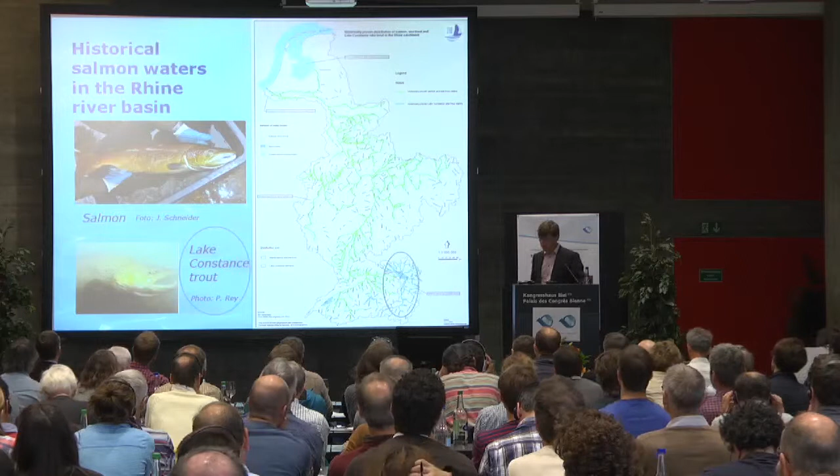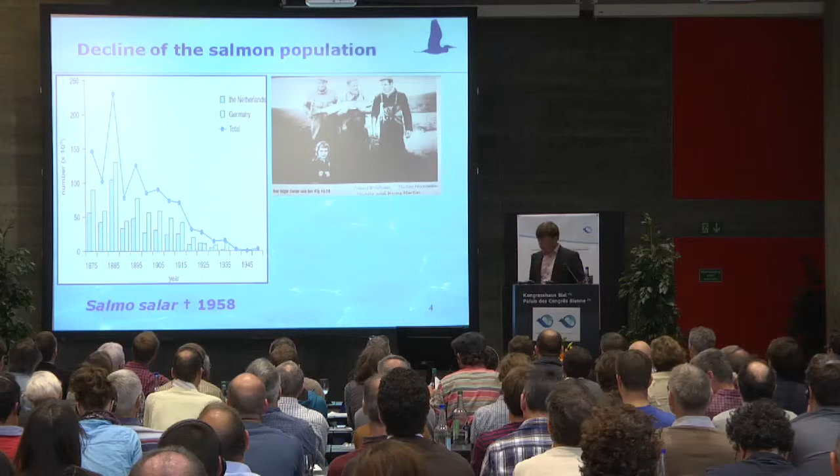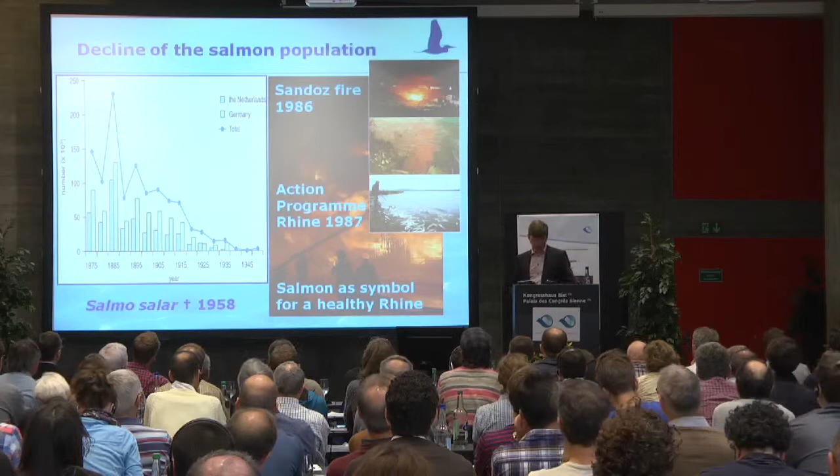And then in 1986, the Sandoz fire disaster practically wiped out the life in the mainstream of the Rhine when a storage of chemical pesticides burned down. And already 1 year later, the Rhine Ministers brought the Rhine Action Program into life. Well, I only tell you this because the ministers took the salmon as a symbol for a healthy Rhine, which was a rather brave thing to do at that time, because it was an extinct species.

However, in the years that followed, the water quality improved significantly, and nowadays we work with the Master Plan Migratory Fish Rhine that aims at the restoration of a healthy aquatic ecosystem. And with a healthy aquatic ecosystem, you will also have a population of Atlantic salmon. So this objective is to be achieved by restoring the river continuity, not only for the salmon, but for all other species, by restoring habitats and by reintroducing young salmons into the system.

The map that you see will be part of the second River Basin Management Plan according to the Water Framework Directive. So it's not for Switzerland, but for all the other countries it is important. And it gives you an impression of the parts of the Rhine system that are now accessible for migratory fish. Well, you can see we have done a lot, but there is still a way to go. The total costs for the whole program are now estimated at 560 million euros. So that will be the whole program, everything that is envisaged now. And I have to tell you that these are the data of October 2014.

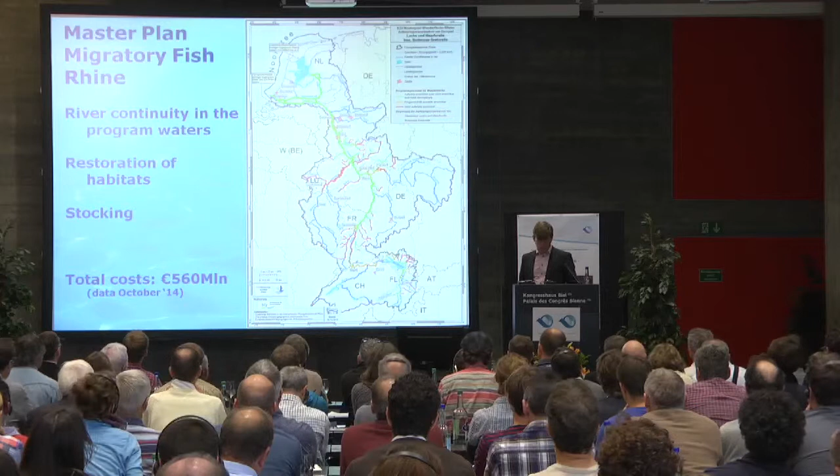In the next slide, I'll go quickly through the measures taken. And I'll start with the river continuity. As you can see, we are working on the improvement of the river continuity, and not only for salmon, but also for the other species. And between 2000 and 2013, almost 500 barrage weirs were made passable for fish. And it must be said that up to now, the main focus has been on the upstream migration.

Secondly, work is being done on the improvement of habitats. All in all, more than 1,000 hectares of spawning and juvenile habitats are supposed to be opened in the Rhine catchment. And in 2012, about a quarter of that, about 250 hectares, were already made accessible.

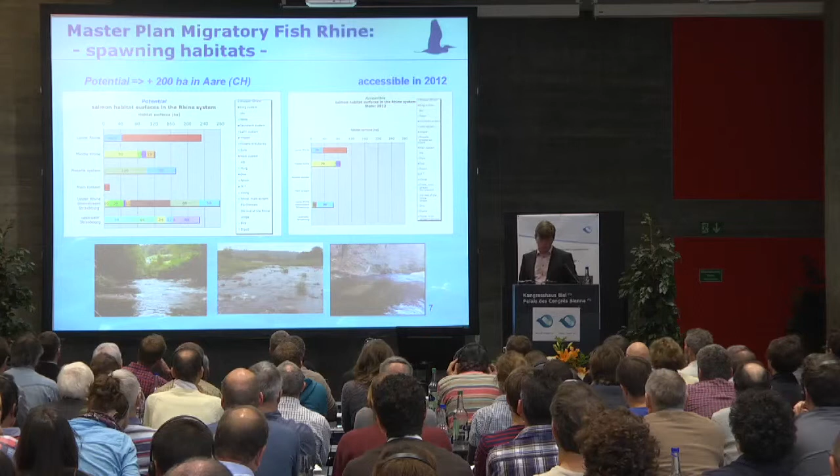Then finally, the stocking. Millions of young salmons and also of other species have been stocked. And all over the Rhine system, the benefits of these actions are to be seen by the growing numbers of fish species that have not been seen for long. And it's not only the salmon, but also, for example, the shad and other species. There are even places where the stocking of salmon can be reduced because of the natural reproduction.

And in this map you can see the very small fish symbols, and where we place the fish symbols, there we have natural reproduction. And the bigger the symbol, the more natural reproduction we have. So I think that's very encouraging if you think of 1987, when the salmon was an extinct species.

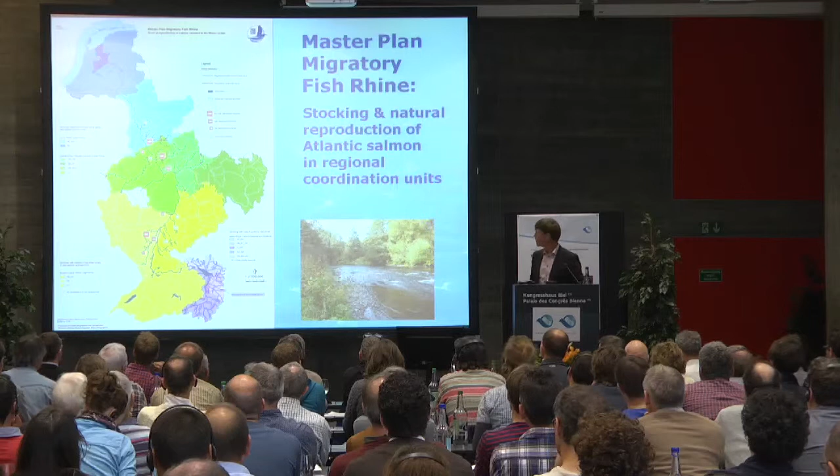All these developments led to this picture on the presence of salmon. And I know I will get a question from Ted Castro, because this is not about percentages, but about the absolute figures. However, it started with a very happy happening in 1990, that the first salmon was found in the Rhine again. So after that, we kept on counting.

But as you can see, since 2007, the trend of growing numbers of returning salmons developed in a reverse direction. And it must be said that even for the fish experts, it is a slightly puzzling picture. There are several possible reasons for this development. It could be that natural predators get used to the growing amounts of smolts. It could be the difference in monitoring. For example, in the Netherlands, fishing with fykes is forbidden since 2011, and we got a lot of data from that. It could be works in the river system.

For example, the land reclamation for the Rotterdam harbour, or the temporary closure of the fish pass in Kostheim. And also the effect of hydropower installations is mentioned. However, as I stated on the bottom, the latest figures are promising again.

In the first 6 months of this year, both in Kostheim and in Gamsheim, the numbers of counted salmons were already higher than the yearly averages of the last 5 years, with another 6 months to go. In Kostheim, 72 salmons were counted, with the yearly average being 70. And in Gamsheim, 56 animals were counted, with the yearly average being 39.

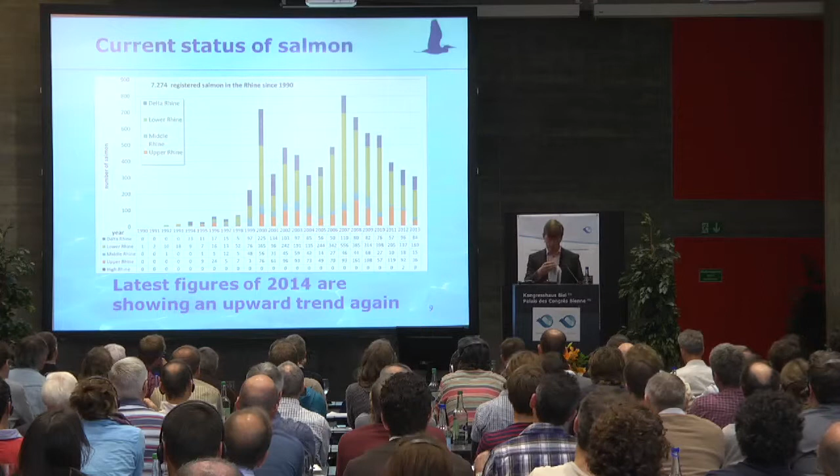With the growing numbers of fish migrating along the river, it became clear that not only the upstream, but also the downstream migration must be secured. The effects of hydropower installations are becoming more and more visible. And partly this is because there are more fish that can be damaged, and partly because the policies on renewable energy increase the number of hydropower installations.

Therefore, in 2013, the Rhine Ministers at a conference stated that for a juvenile salmon or adult eel, the downstream migration in the turbine areas is critical because of the great danger of injuries, particularly in cases of successive hydropower plants. And the ministers stated that no new obstacles should be constructed, and asked the ICPR to work intensively on the joint determination of innovative techniques of downstream migration.

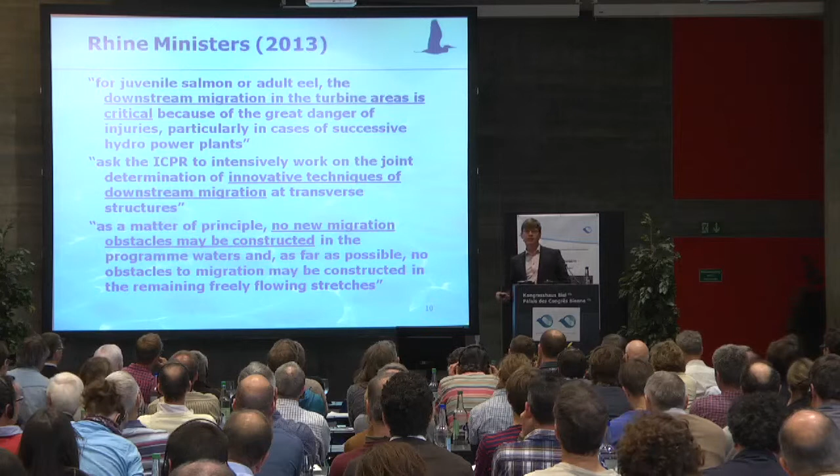So I think now it becomes more interesting for you, because this is where we started, in order to comply with the wish of the Rhine Ministers. We started with an inventory of the bottlenecks for downstream migration. All the Rhine countries collected data. And in this map you can see an overview of the 552 obstacles or bottlenecks along the river. Only a few of them have downstream migration facilities, namely 29, which is about 5%.

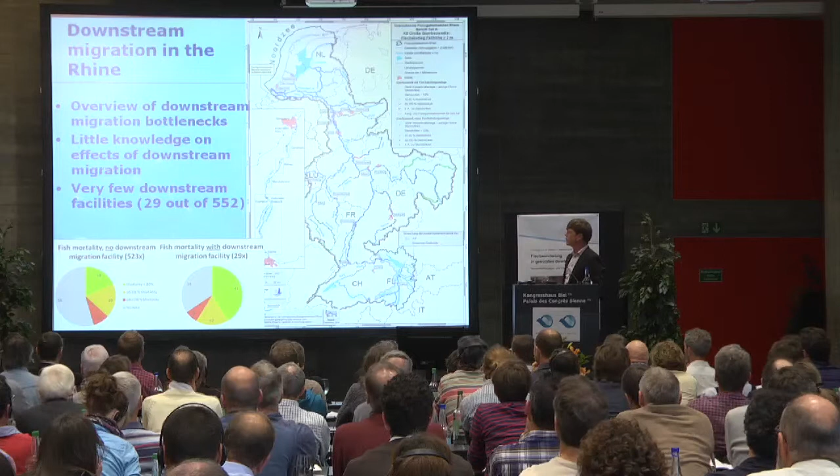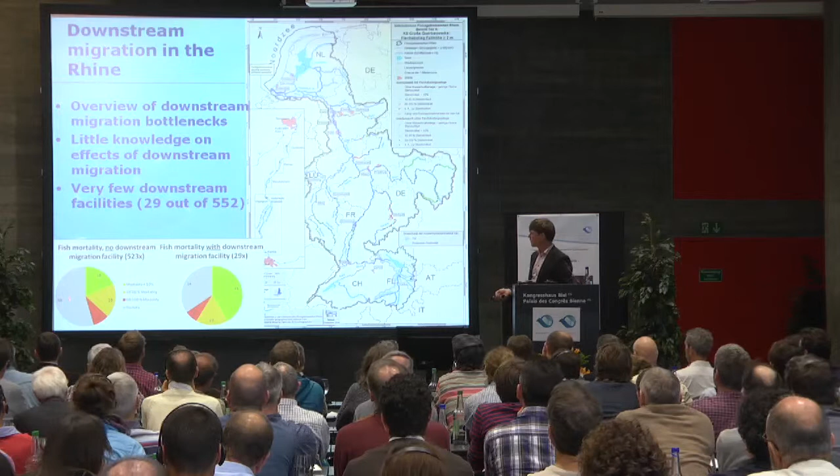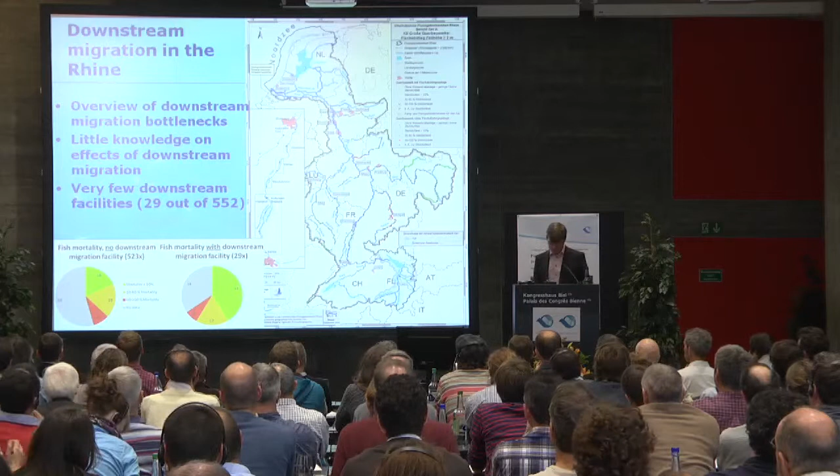And I should click. We asked the authorities whether there was fish mortality or not, and as you can see in the bottom left, for about 45% of the installations they don't know, and even in the cases where downstream migration facilities are installed, still for 34% they don't know whether they work or not. However, you also can see that they expect that there is a positive effect of the downstream migration facilities. Now, later on, we'll see whether they do work.

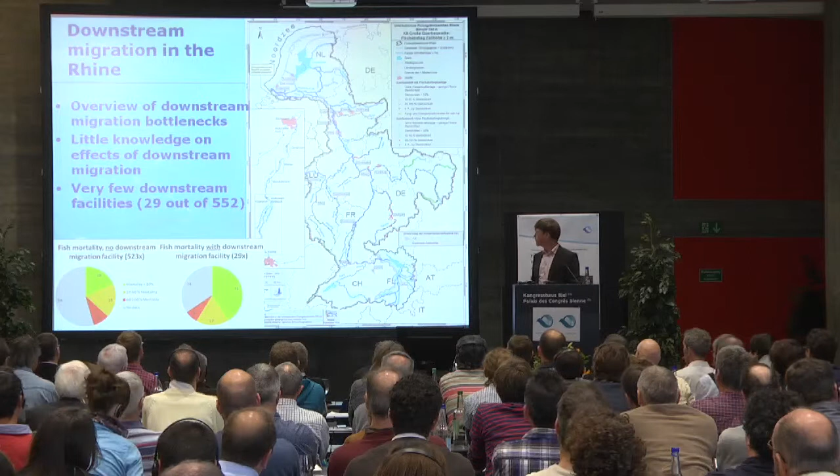Of course, these facilities are needed mostly in the cases where we have hydropower. Now, in the Rhine system, the most widely used designs date back to the 19th century and the beginning of the 20th century, in times where fish migration was not an issue. And in the Rhine system, the Kaplan turbine is dominant, where we counted 159, especially along the mainstream of the river. And other types are the Francis and the Banki-Mitchell, which is also known as the cross-flow turbine. And in smaller, newly built stations, you sometimes see the Archimedes screw turbine.

Well, in this picture of the Kaplan turbine here, you see there's a man standing on it. So it's a huge thing. This is one of the turbines that is installed in the Vogelgrün installation. Well, numerous experiments have been conducted in various countries to determine the mortality rate due to the passage through the turbine. And that rate varies from under 5% to over 90% in Francis turbines, so the one over here. And on average, it's a bit lower in Kaplan turbines, from under 5% to approximately 20%. Well, we'll hear more about this when Steve Amaral does his presentation.

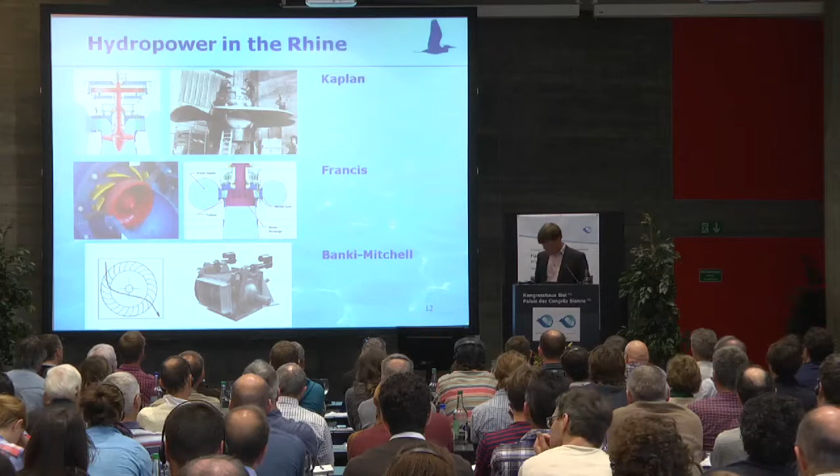So the first measure is to prevent fish from passing the turbines by using screens. We have 3 recent studies on downstream migration facilities, and I must say that Mr. Bauerfeind already showed you some of those. Not this one, however. The first study we found was on Kostheim, the Kostheim installation in the Main River. It's a study of 2011. The hydropower station there was built between 2007 and 2009.

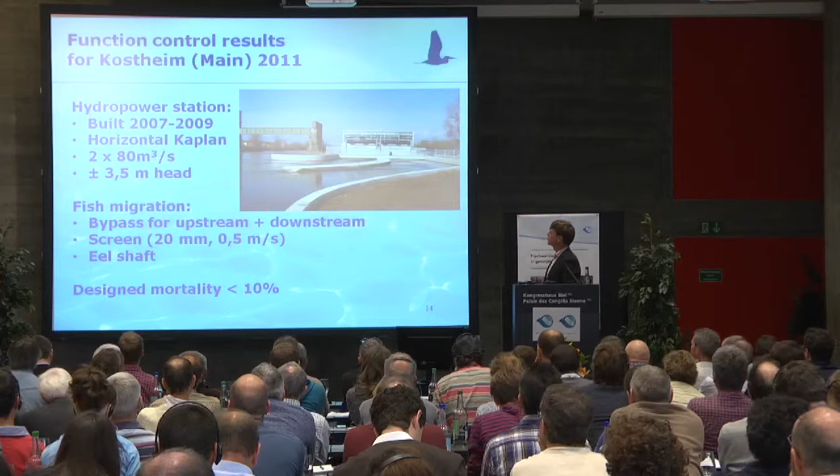It's a horizontal Kaplan, 2 horizontal Kaplans with a flow rate of 80 cubic meters per second. It's about 3.5 meters head. And the fish migration facilities are a bypass river for upstream and downstream migration, a protective screen, 20 millimeters wide and 0.5 meters per second velocity, and an eel shaft. And the designed mortality, so this is what they thought that it would be, was less than 10%.

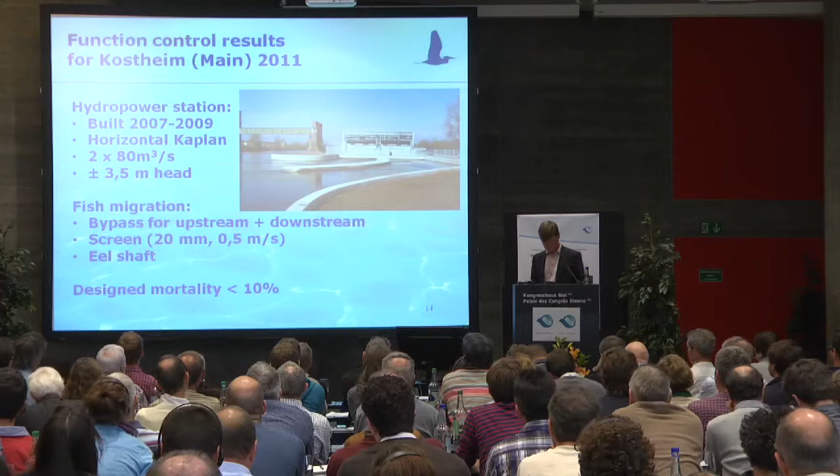Well, this turned out not to be the case. The mortality is about 50% because of the screen cleaning, because of screen and turbine passage, and it depends a bit on the discharge, on the species, on the individual differences, and also on the intervals in screen cleaning. The screen turns out to be passable for eels smaller than 65 centimeters and for other species smaller than 25 to 30 centimeters.

Smolts passed the screen tail first and were stripped of their scales before being struck by the turbines. Even at optimal circumstances, which should be optimal at low use of the turbine, about 50% of the bigger eel ends up in the garbage coming from the screen cleaning. In normal operation, the eel shaft is used neither by eel nor by other species as a downstream migration facility, and the bypass river is not significantly used by migratory fish for downstream migration either.

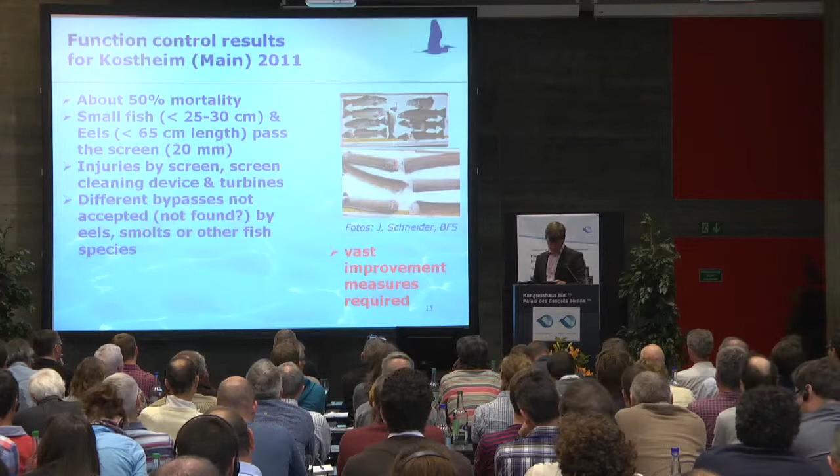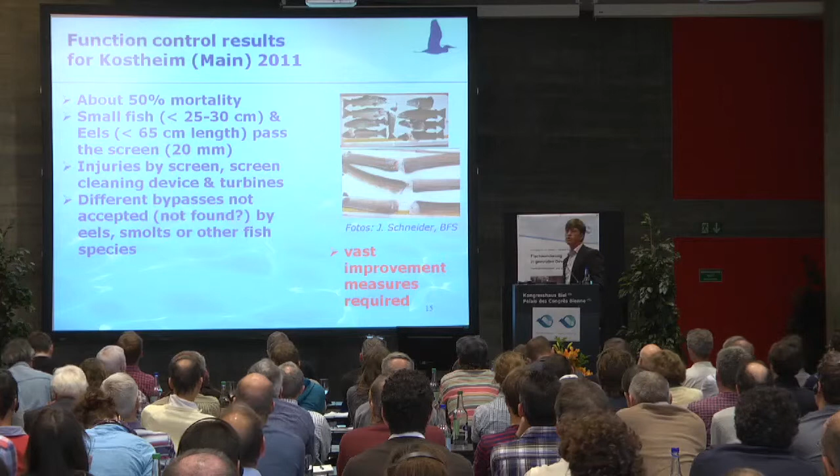Finally, the salmonid downstream facility at the top of the screen does not work. So something must be done there. It's a bit of a pity because the whole installation cost about 20 million.

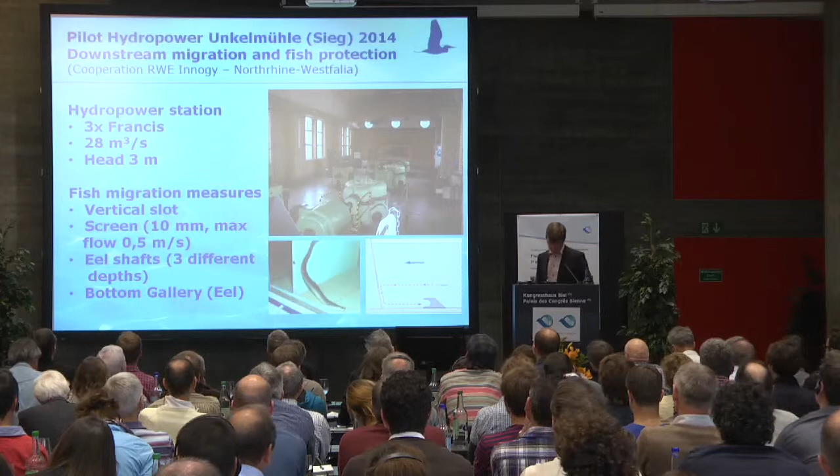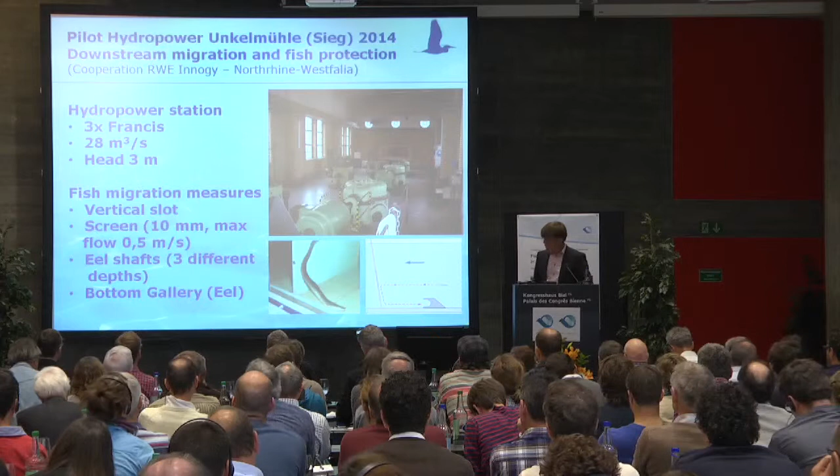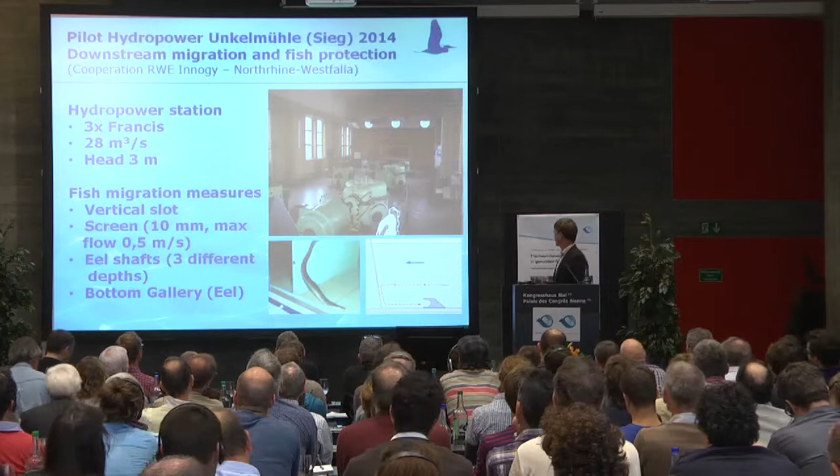Well, there will be 2 installations that were already presented to you. Unkelmühle in the Sieg. The station is 3 times Francis, 28 cubic meters per second, at a head of 3 meters. Fish migration measures are a vertical slot, a screen. Well, you've seen everything about it. What wasn't told is that there's also a bottom gallery, and that's especially for downstream migrating eel. And the idea is that the eel swims to the screen and then swims back into the bottom gallery and is moved downstream.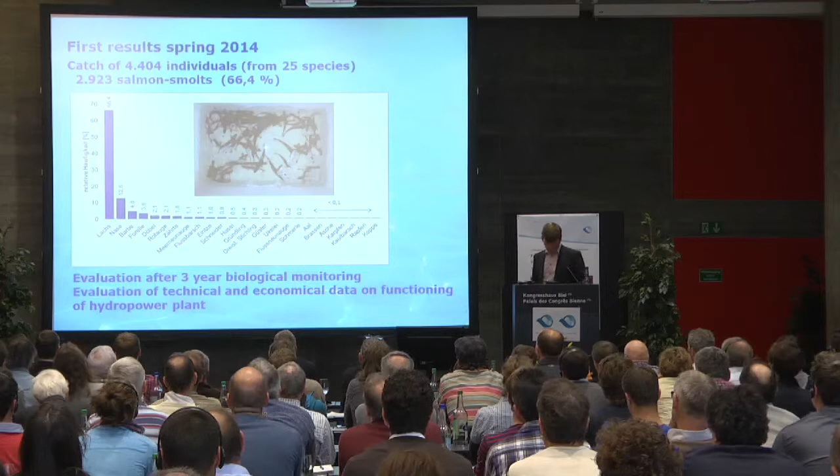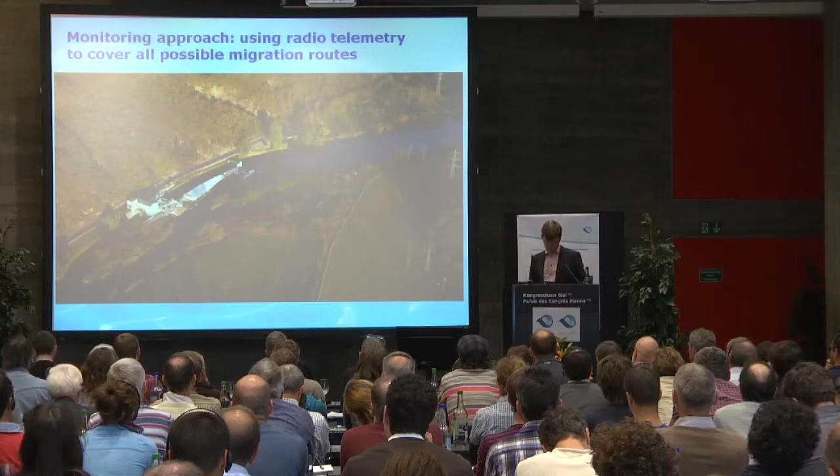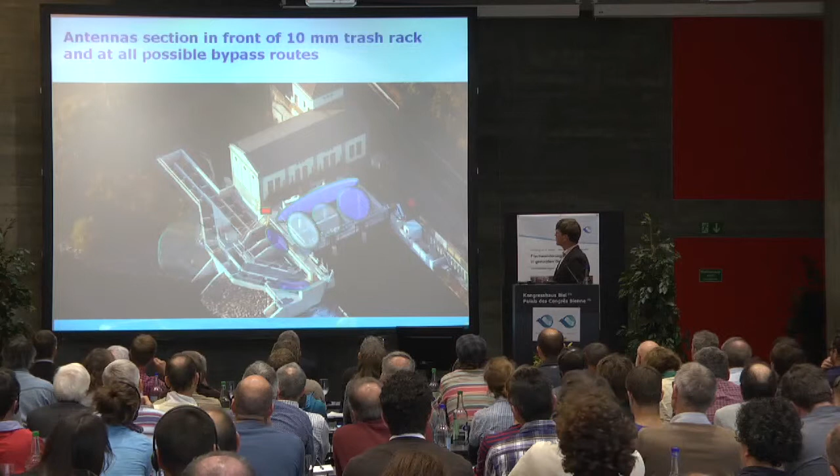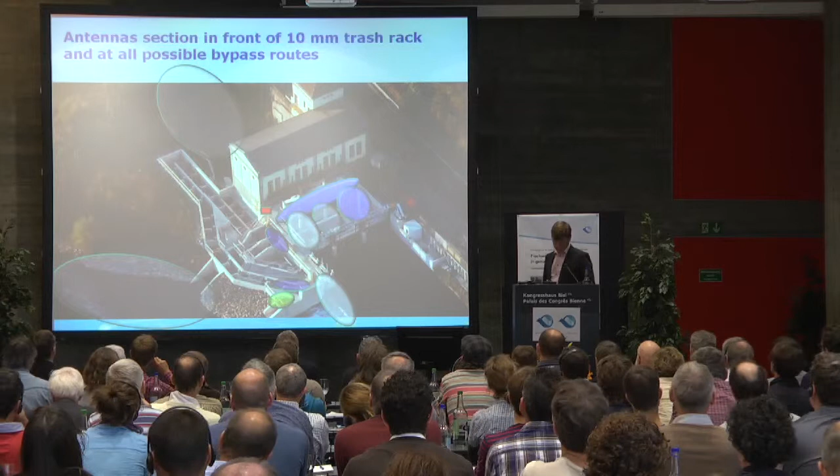A 3-year period of biological and technical monitoring will be ongoing until the end of 2016 in order to evaluate the biological and the technical results. And by the technical results is meant the energy production and the energy losses, because the screens are good news for the fish, but also cause a loss of head. And these are the places where the antennas are installed around the installation. And here they are installed within the installation. So I think after 3 years we will be able to tell a lot more of what's happening there. And in spring 2014, there were already smolts equipped with radio tags and silver eels released upstream of the installation.

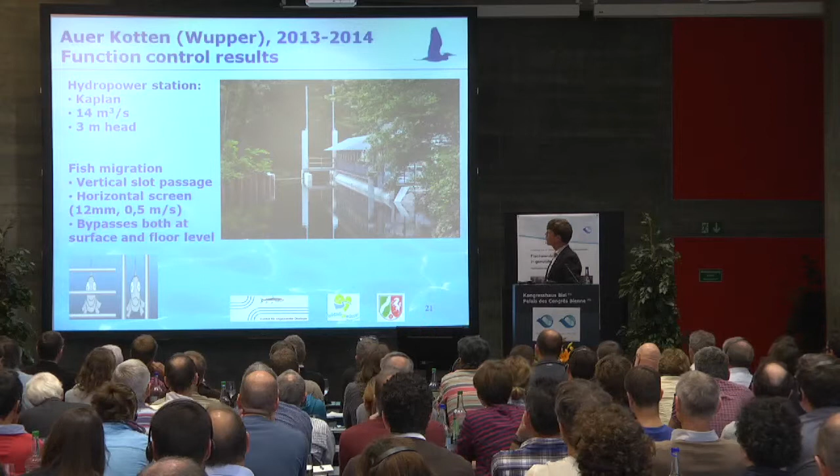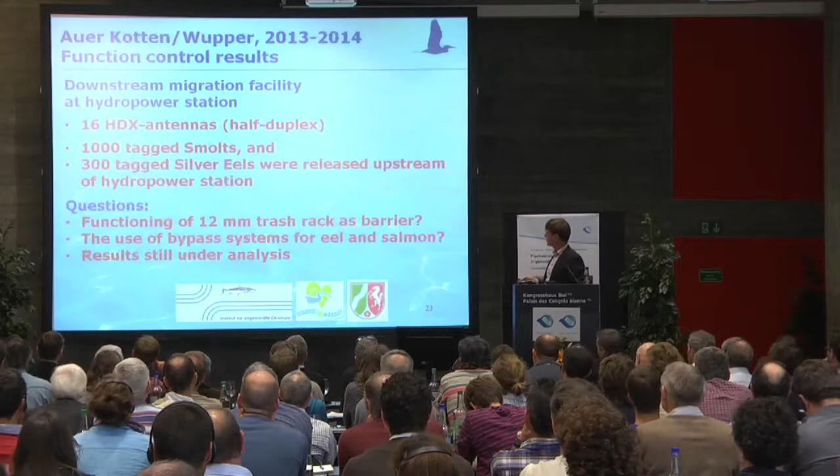Next one, also a well-known slide. Auer Kotten in the Wupper River. This was an existing hydropower station where the screen was placed in front. So it's a Kaplan turbine, 14 cubic meters per second, 3 meters head. Well, we've seen everything that was installed there, so I won't go into that. The bypass, again, you've seen that. So the question was to evaluate the functionality. The installation is equipped with 16 HDX antennas, and yesterday Hendrik Hoefkaart already showed you how they work, so I don't have to do that.

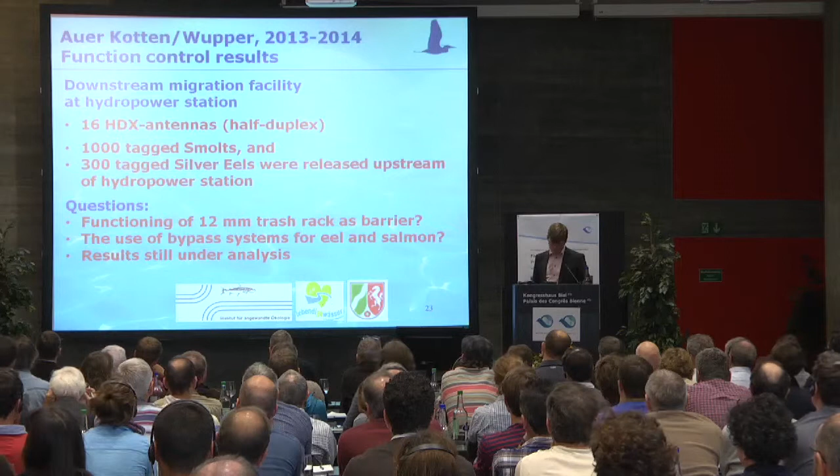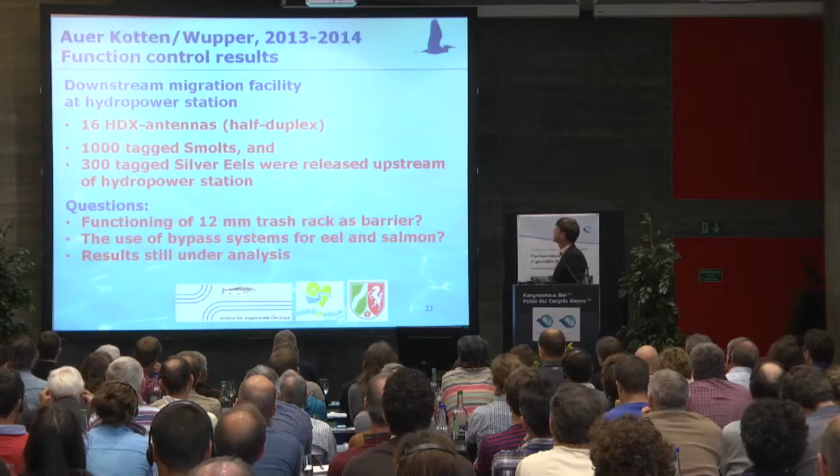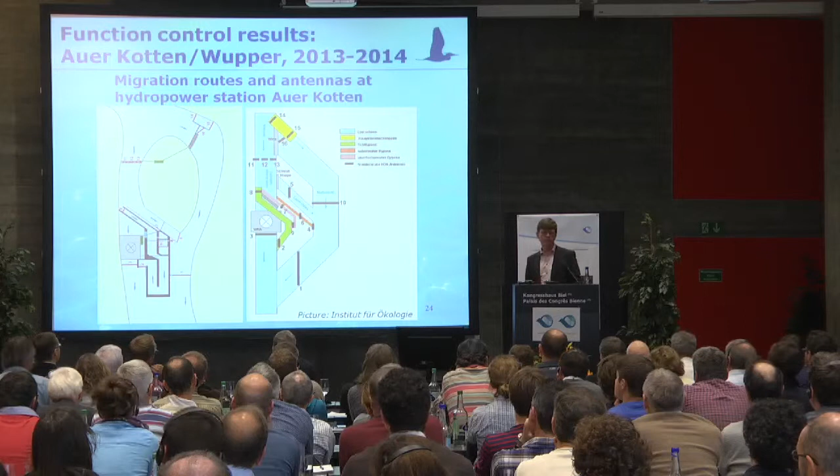Then we go to the alternative turbine design. Also a question already posed. Well, the first one where we found studies was the Archimedes screw turbine. Of course, this is a very, very old design, but mainly used for pumping.

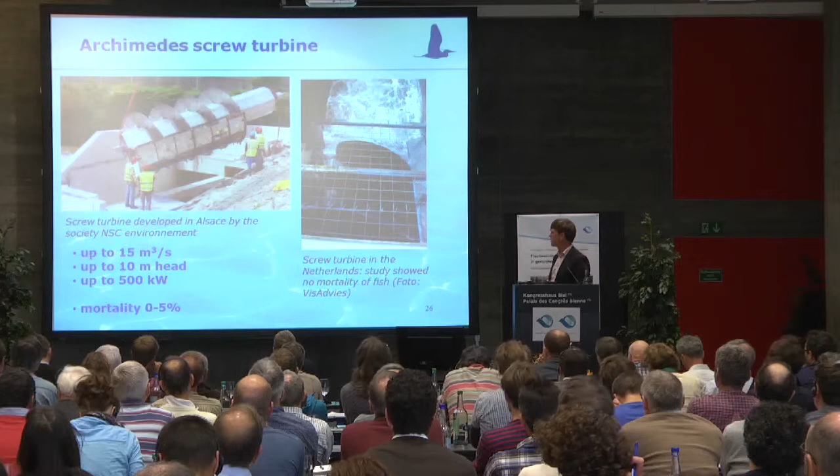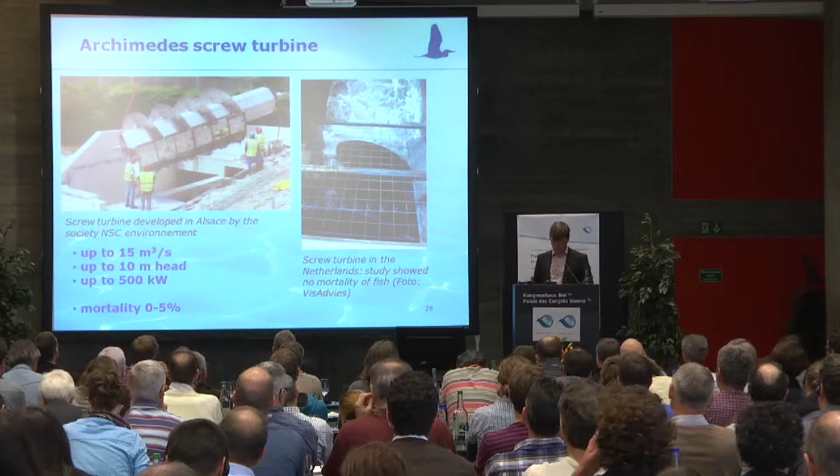Well, it's usable up to 15 cubic meters per second and 10 meters head, and you could produce up to 500 kilowatts. And the studies on fish mortality there have different outcomes. Some studies report no mortality at all. Some studies report no mortality, but a little avoidance. And there was also a study in Krechting, Bocholter Aar River in Germany, that found a mortality of 5%, and the 5% were especially fish smaller than 10 centimeters. So the bigger fish passed unharmed, but the smaller ones didn't.

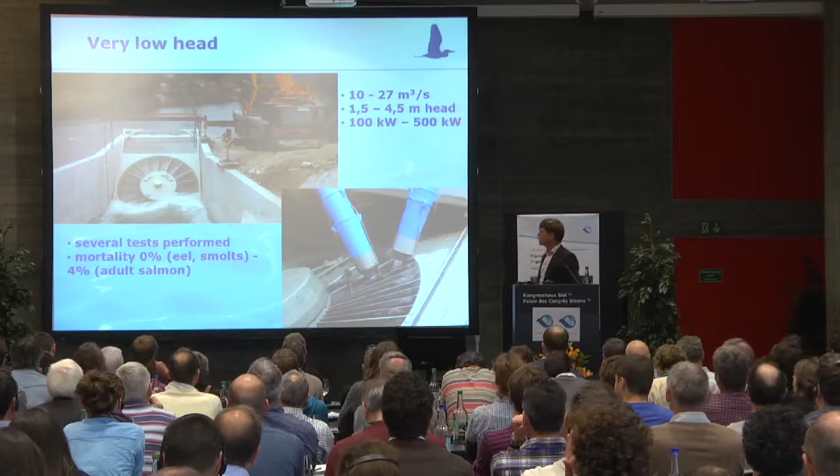Then there's the very low head. I think it's a French design. It can take from 10 to 27 cubic meters per second, 1.5 to 4.5 meters head, and it can produce up to 500 kilowatts. They have several tests performed also, and in some tests they found no mortality at all. And then there was one that found no mortality for the smaller ones, for the eel and the smolts, but up to 4% for adult salmon. And adult salmon, that was like this. So that's huge fishes that should pass there.

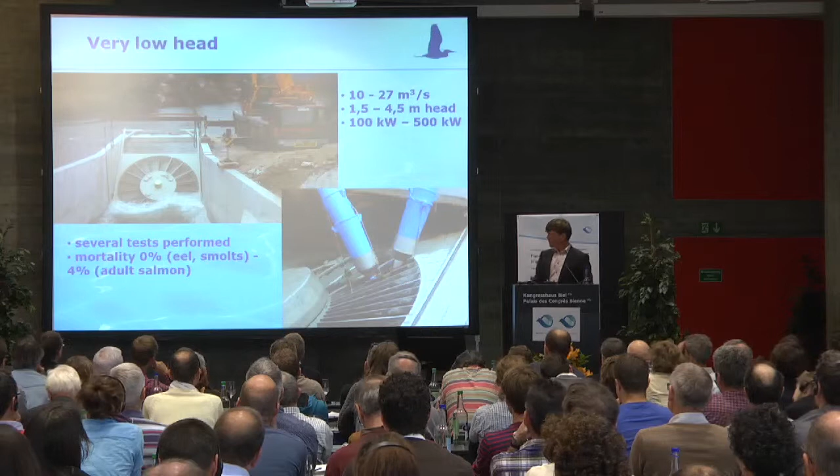And finally, but we will hear more about turbines later on, is the Pentair Fairbanks Nijhuis, which should be able to cope with 1.5 to 150 cubic meters, 1.5 to 8 meters head, and up to 5 megawatts of production. And tests with living eel, you can see the test facility here. They come in, the water flows here, and the eel was injected there and goes down. 3 cubic meters per second, 5.5 meters head, they found no direct mortality, and no means 0.0%, and also no delayed mortality, and in order to test that, they were kept for 96 hours.

And as far as I know, they are planning to install an installation like this in a hydropower station along the Maas in the Netherlands. And the idea there was that the hydropower plant was told to install something with a mortality less than 2%. I think that alternative turbines are the only solution for bigger hydropower installations along the Rhine. If you look at the Vogelgrün installation, it's about four turbines of 350 cubic meters each, and a head of 12 meters. You won't do that with a screen. You must do something with a turbine.

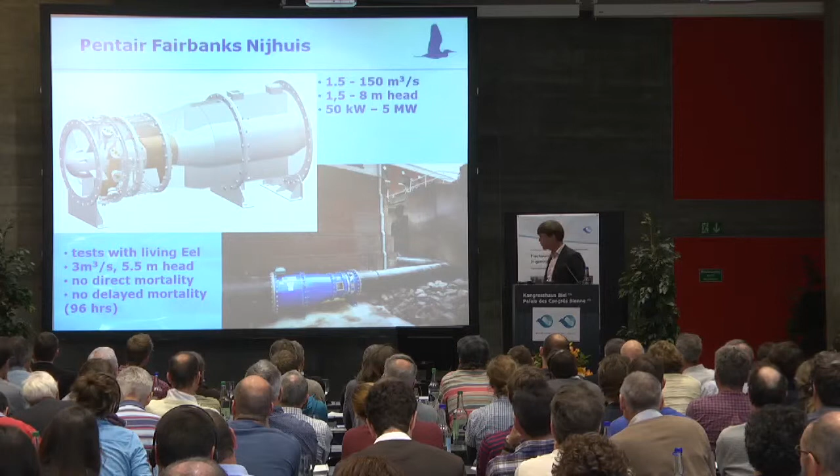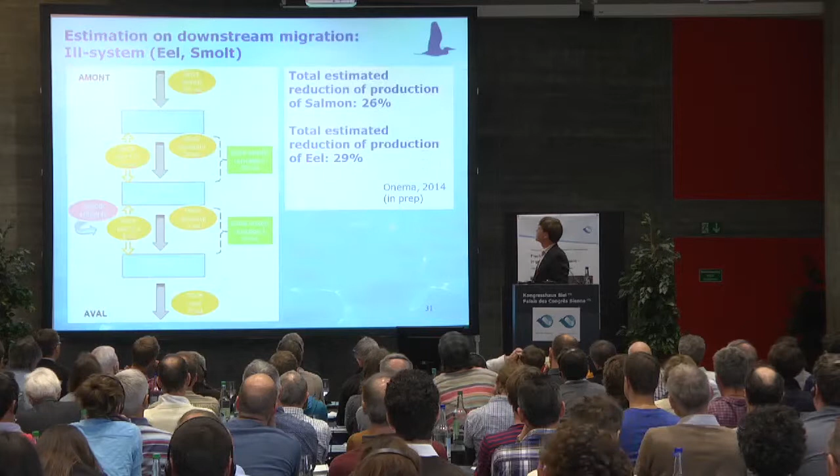So luckily, they work on another study, also by Onema, and it's still in preparation. And it's on the Ill River, tributary to the Rhine. And this study on eel and salmon took into account the spread of the populations in the river basin, their periods of downstream migration, and the hydrological data during those periods, as well as the data on the hydropower installations in the river basin. And it concluded a reduction of the salmon of 26% and of the eel of 29%. So that was for the whole basin.

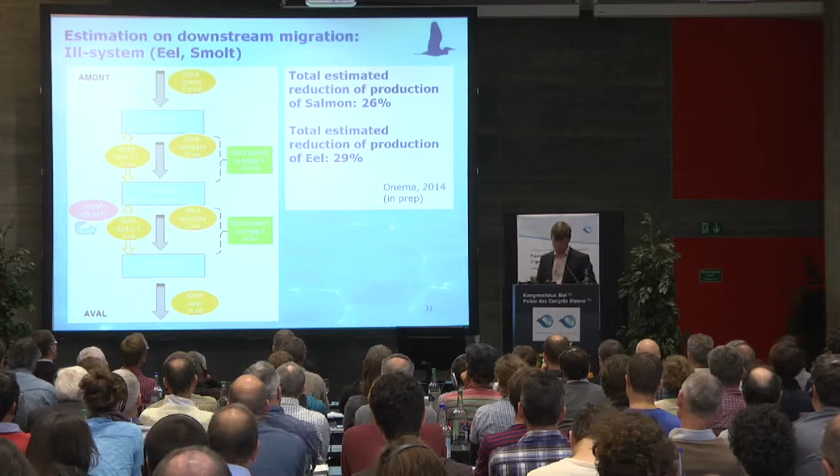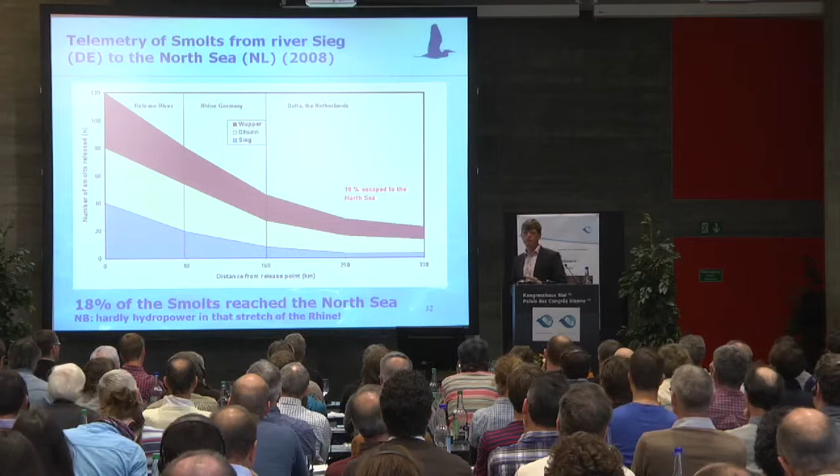And finally, there was a combined German-Dutch study on the success rate of downstream migration of smolts from the Sieg River using telemetry, and that showed that only 18% successfully reached the North Sea. Now, it must be kept in mind that in this stretch of the Rhine there is hardly any hydropower. There are some small installations in the side branch of the Rhine that takes about 1/9 of the total discharge of the Rhine. So this is mainly, you could say 99%, because of predation of birds and fish, etc. And fishing with fykes is forbidden in the Netherlands, so that could not be the case too.

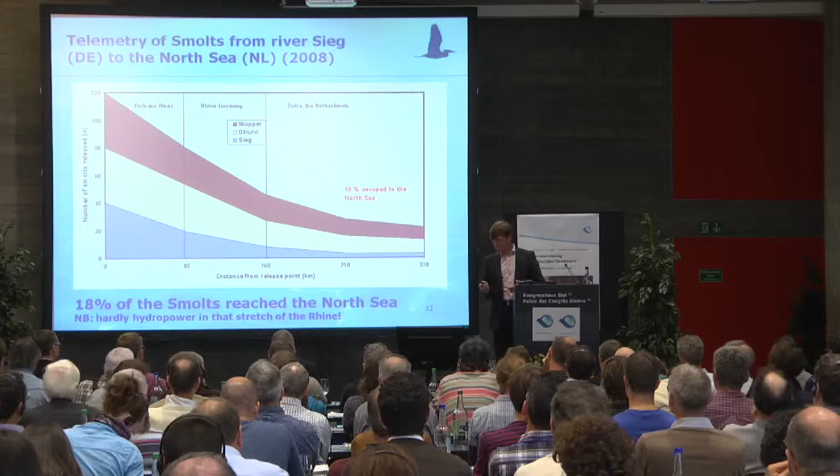So I come to the conclusions. After a successful improvement of water quality and river continuity in the River Rhine, the salmon could be reintroduced. And with the growing numbers of fish migrating along the river, it became clear that not only the upstream but also the downstream migration must be secured. Hydropower installations form a serious threat, not only for the migrating smolts but also for eel. In the recent past, several developments have focused on smaller hydropower. So we've seen mainly the screens. And the actual effectiveness of those measures must be checked on site, as we learned from Kostheim. And for bigger installations, new developments are urgently needed.